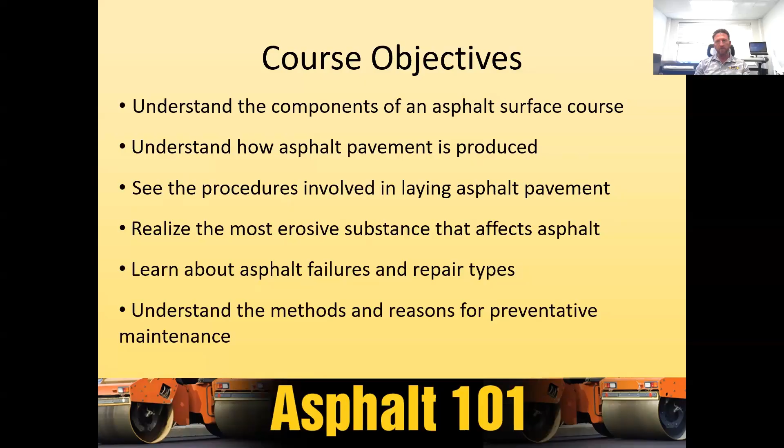And then we'll talk about what repair types correspond with each type of failure. We'll spend a brief moment on the methods and reasons for proactive or preventative maintenance, so we're not constantly going in and patching potholes and doing reactive work. We're planning for the future so we can budget better and so we don't have liabilities or libelous conditions on our property.

This is a typical asphalt pavement cross-section. A cross-section is basically if I ran a saw blade down the center of an asphalt pavement, or down the center of a wood table, this is what you would see if you looked directly at that saw cut.

Asphalt is a conglomerate material, but asphalt isn't something that you can just go get from the plant, dig out 2 or 3 inches of native soil, compact it, and then put the asphalt down. If you did that, your asphalt would fail immediately on putting a load on it.

Part of the structural number, about 25% of the strength and 100% of the foundation of an asphalt pavement, is called the base course. What that's made of, particularly here in South Florida, is a lime rock base. This is our foundation, and it's going to act as a bridge between the native soil material and the traffic loading portion, which is going to be our surface course.

It's typically between 6 to 8 inches thick, and it is constructed so that we have a solid neutral force, or a neutral foundation, below that asphalt, so that when a load is applied to it, it's distributed down through the surface of the asphalt, through the base, and then it acts as the neutral force back up to counterbalance that load that we put on asphalt.

On top of that base, we've got our asphalt surface course. In other parts of the world, or other parts of America that aren't South Florida, this surface course can be anywhere from 3 to 4 inches thick, and sometimes they'll even have 2 layers of asphalt. They'll have a base or binder course, which is a little bit larger rock for loading, and then a second course that's your surface course or wearing course. That's what you actually drive on, and it's the smoothest, smallest rock course.

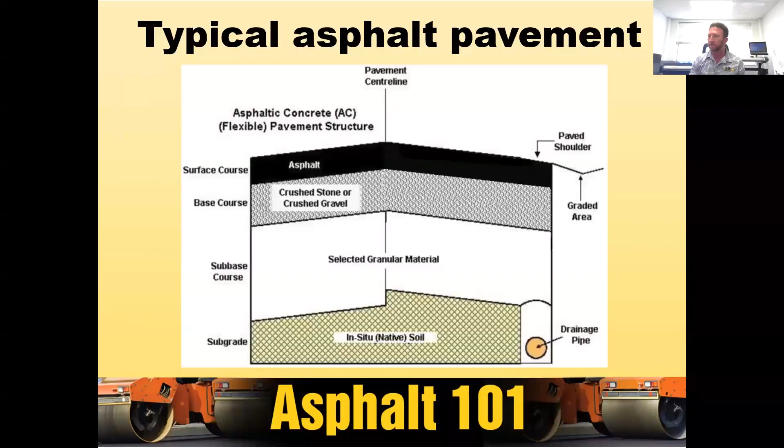What are the components of an asphalt surface course? 95% of asphalt concrete is just aggregate rock, but it's not gravel. Don't get the idea that this aggregate rock is just gravel or 57 stone that's all the same size. It is about anywhere from 8 to 12 different sizes and types of rock.

We need it to have large rock, which is going to be our load bearing rock and stone, and then we need it to have small aggregates, sand, fines, even down to dust that are void filling. We also need these to be angular. We don't want rounded edges or smooth stone in our asphalt, because it's impossible to get that tight compactness and not create voids. When you have voids present in the asphalt rock mixture, the rocks don't bind together when they're compacted, and you have open space.

When you have open space and you put a load on it, what happens? You get deflection of the pavement. So we want all this large rock, small rock, fines, and dust to all come together to create pretty much a solid matrix with very, very minute voids in between them.

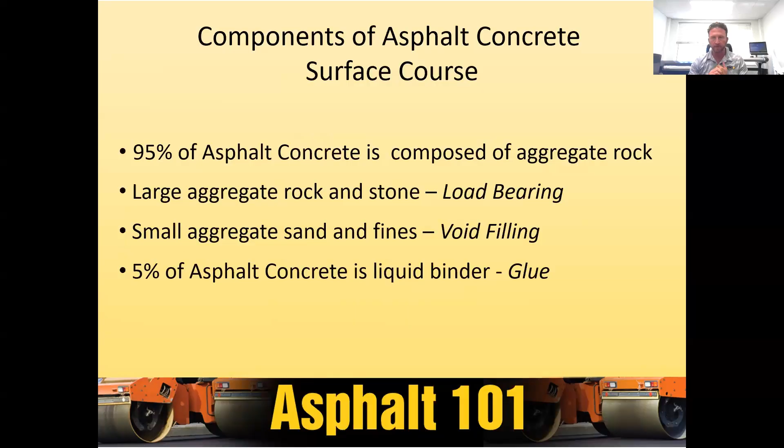The next 5% is simply our asphalt cement or liquid binder. That's what's going to hold everything together. This is also what drives the cost of asphalt and the price. This is asphalt binder. It's the resultant of the refining process of petroleum, and we're going to put anywhere from 4% to 7% of the total volume of this material as hot liquid binder.

That's what makes the pavement black, and that's what holds all the rock together. Without the rock, binder is useless.

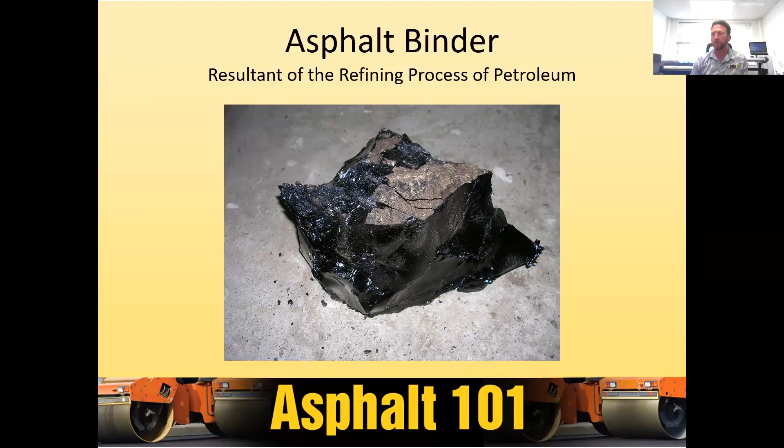Without the binder, the rock is just a gravel road. This is where we mix it in the plant together. You mix it all at a very high temperature and you get bituminous asphaltic concrete, which we just refer to as asphalt. You can see how people would start confusing asphaltic concrete with regular Portland cement concrete very quickly.

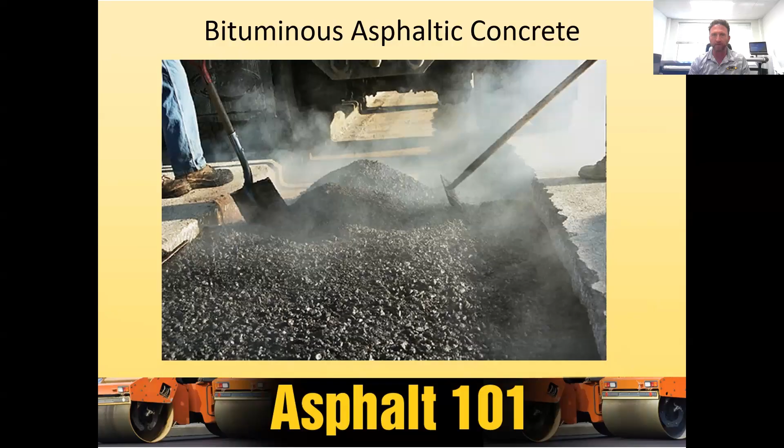They allowed us engineers to go back and say, okay, how can we confuse the public less when we're talking about our pavement materials? In this case, we're just going to call it asphalt. How do we produce this stuff?

We determine our design based on the intended use. I'm not going to use the same asphalt pavement on an HOA community street as I would in a Publix loading dock area or on an interstate. We're really determining how much load is going to be on it when we design an asphalt pavement, especially the thickness, but also the type. We're looking at how many trucks are going to be driven on that pavement in any given time frame.

We don't design asphalt thickness or mixes based on how many cars are going to be on it. They're inconsequential to the strength and longevity of asphalt pavement. We design it based on truckloads and drainage characteristics predominantly. What are we putting on it? What's the intended use of that pavement? Is it a neighborhood street? Is it an interstate? Is it a distribution center? Is it a shopping center? All of those may have a different specified material.

The amount of each component is based on the design. So how much of each size of rock, fines, and asphalt binder? There's about 25 plus or minus FDOT approved asphalt mixes that run the gamut of different consistencies, different rock sizes, different binder contents, different percentages of recycled pavement, etc. About 9 of those are surface mixes, what you would put on top for us to drive and walk on. All these components are mixed at the plant and heated at temps between 275 and 325.

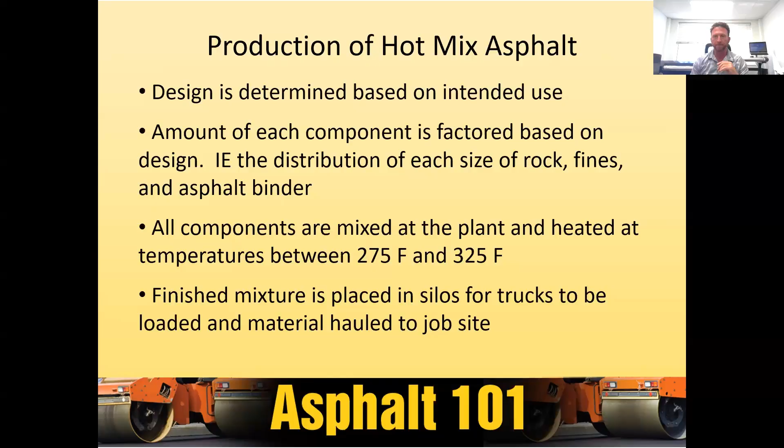That's called recycled asphalt pavement, and it's used to kind of perpetuate asphalt. Asphalt's the number one recycled material on planet Earth. So when we build or maintain existing roadways, we'll mill off a certain thickness of the existing asphalt pavement surface. Those millings are then hauled back to the plant, cleaned up, run through a screen, crushed, and then added in as part of the mix design of an asphalt pavement.

FDOT allows up to 40% of any given mix to be included as recycled asphalt pavement. In a real world scenario, we typically don't pull anything less than or more than 30% RAP. So you've got 70% virgin rock and binder, and then 30% recycled asphalt pavement.

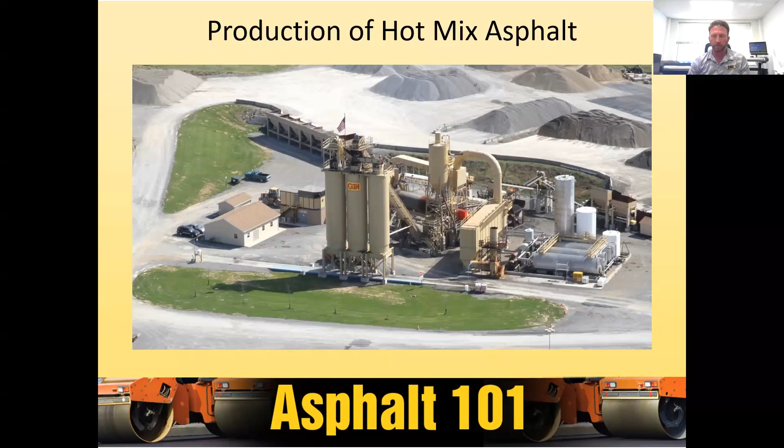So what am I going to do when I start laying this stuff? I've got my plant, the plant's waiting for me. I've got an order in for, say, 400 tons we're doing today. So the first thing I'm going to do is prep the surface, and this is very important.

The cool thing about a milling machine is if I've got 4 inches of asphalt on a roadway, I don't have to take out 4 inches to repave it. I can specify a depth of, say, 1.5 inches, and mill out that 1.5 inches and put back 1.5 inches. So I don't have to take out everything that was constructed first.

Now, as we talked about earlier, if I've only got 1 or 1.5 inches of asphalt, I'm probably milling down to the base rock anyway. But in areas where I have thicker asphalt, or areas that have been overlaid 3 times—a parking lot or roadway—I can take off a specified depth, so I don't have to go full depth.

This machine's got a 4 to 6 foot wide steel drum that spins at a very high rate of RPMs, with carbide bit teeth on it. As it moves along, it chews up that surface at the specified depth, then it comes through that long conveyor neck and spits the millings out into the back of a tandem dump truck.

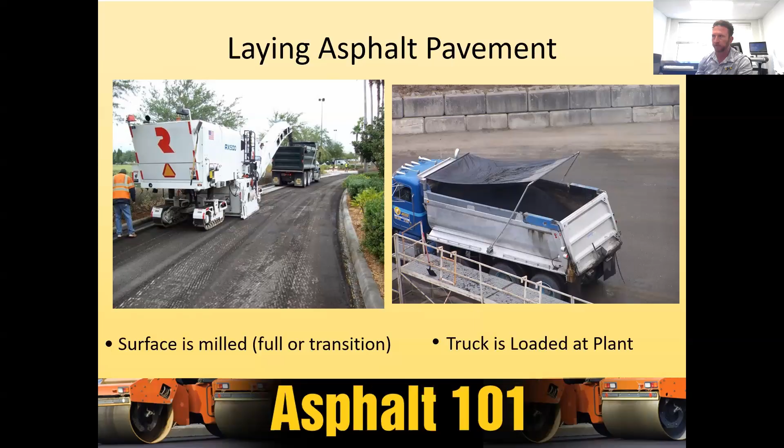While I'm doing my milling and removal process, I've got a truck being loaded at the plant, or multiple trucks being loaded to stage at the plant. I'm going to put a liquid tack coat over the surface. This is a grandiose example, but usually a good rule of thumb for my liquid tack coat is you shouldn't be able to take a step on the tack surface without getting tack on your shoes or boots.

This tack coat is my bonding agent between either the milled surface, the base rock, or just a regular non-milled asphalt surface if I'm doing an overlay. This is basically creating a very sticky, very adhesive surface that my new asphalt is going to go down on. If I don't put down tack, I risk delamination, where parts of the asphalt shove up and slip off the surface because there's nothing holding it to the previous surface being overlaid. Think of it like your driver's license: you've taken it in and out of your wallet 150,000 times over the years, and the edges start to peel back, and that laminate starts to come off. Same exact principle. I don't want that new asphalt to slip free from the surface, so that's why I'm going to use a tack coat.

After my tack is applied, I've got my truck that was sent to the plant, and it's going to load into my paver to overlay the surface with new pavement. Again, I'm using a wearing course mix, a surface mix. An example of that is Superpave 9.5, or S3. That basically means 9.5 millimeters is the largest rock in that mix, so I've got 9.5 millimeters and under within that rock matrix.

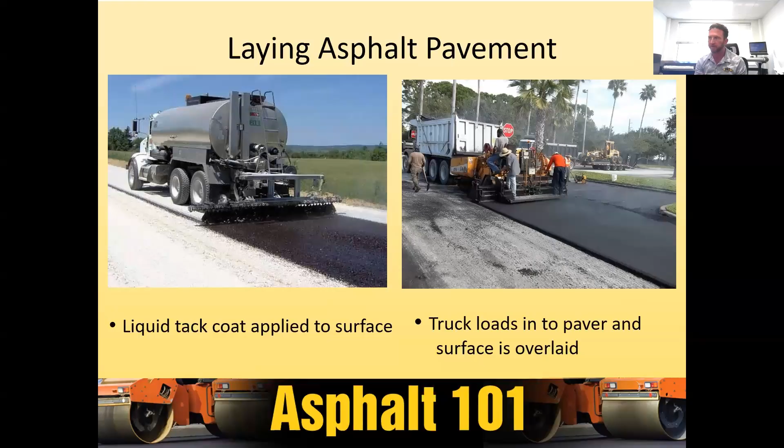After it's out of the paver, I'm going to roll and compact it with a vibratory traffic roller. What this guy's going to do is get me my finished elevation and fully compacted surface for the asphalt, so cars and trucks can drive on it. Out of the paver, I've only got about 82 to 85 percent relative compaction, which means if I put a truck on that without compacting it further, it's going to create ruts, shove the asphalt, and create tire tracks. It's not ready - you're not finished once it comes out of the paver. Even though it may look nice and smooth, you don't want to drive on it yet. You've got to put this traffic roller on it.

This roller weighs between 4 to 6 tons, very heavy. We're going to do an industry standard of 2 passes in both directions - 2 with the vibrator on, 2 with the vibrator static. My first 2 passes are vibrator on, which gives me my most compaction - it consolidates the material and presses it down. My last 2 passes are static, without the vibrator on. That should get me down to about 92% plus relative compaction, and I'm ready to drive on it.

This all has to happen within about an hour to 2 hours to ensure I'm compacting that material at a temperature of about 225 F or above. If I don't compact it at that heat, if I let it get a little colder, I risk loose aggregate at the top called raveling. I risk segregation, where you can see some voids in the aggregate when you look closely at the pavement surface. The ideal pavement surface should look very, very flat, like glass.

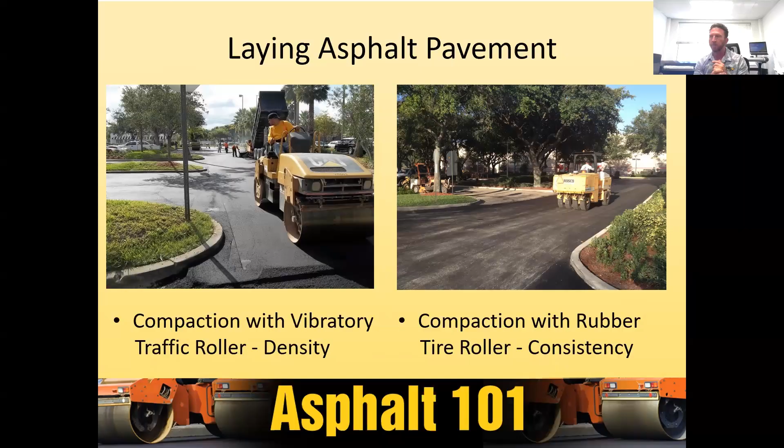My next step is I'm going to compact it with a rubber tire roller. That's going to give me the surface consistency I'm looking for. It fills any voids, like if some rock popped off the surface during the other rolling procedure, and it gives that material its first introduction to what a rubber tire feels like. So we're basically getting it prepared for tire traffic from cars and trucks. After that point, I'm done and this is ready to drive on.

My last step is I'm going to apply the pavement markings per the design professional or local code. Pavement markings are a traffic control measure - these are safety measures. They're telling people when to stop, where to turn, and where to park. So we can't take these for granted, and you certainly want to get them right the first time, especially on a brand new pavement.

So a stop bar, that's what that thing is. It should be accompanied with a stop sign nearby - that's where you're supposed to stop. Everybody in the audience, you're supposed to stop behind this guy, like you remember from driving school. Then you can slowly move out to the intersection and make your turns or make your through movement. That's why we have the stop bar there. Directional arrows will tell you which way you need to go as far as traffic flow.

A little tidbit here - something not necessarily asphalt related, but I think everyone should know. When I've got a double yellow line, that means I've got traffic moving in two different directions, and it's splitting that. If I've got a single white line, that means I've got a lane division, but traffic moving in the same direction. So when you see yellow, it's splitting a traffic lane for cars moving in opposite directions. When you see white, it means you're separating traffic lanes that move in the same direction. A lot of people may not know why we do it that way, but that's why it's done that way.

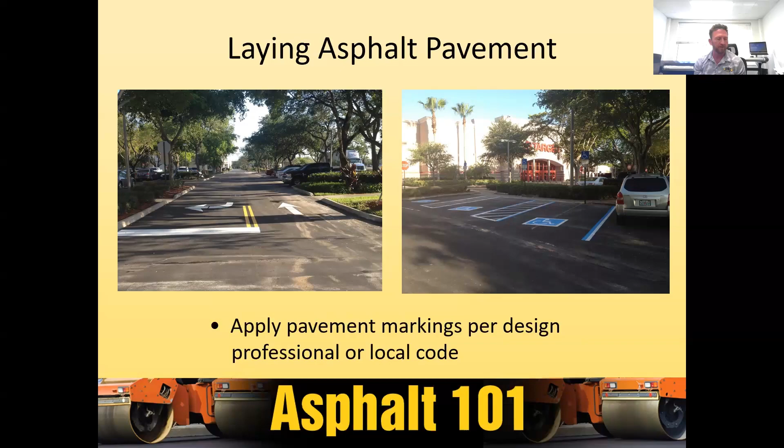I don't have to tell you guys, but especially with regard to ADA, it is a code enforcement thing, and you need to have the right spacing, the right angle, and the right size for both the parking space and the access aisle to ensure that you're compliant with ADA code. So let's get it right the first time.

So I've got my brand new pavement. I've made this investment. Everyone in the community is super happy. The project gets done. And now, just like everything else in life, it starts to decay and die on us the second we walk away from it. Whether you put a new roof on, do an HVAC improvement, or do a parking lot, Earth starts to take over, the elements start to win, and we've got to know how we're going to maintain this investment.

First, we're going to talk about corrosive substances. These are the things that are bad for asphalt surfaces. Gasoline and oil spills, I don't have to tell you that - go to any AutoZone, Advance Auto, or O'Reilly Auto Parts and look at the front parking spots and see what oil stains do to asphalt pavement. Battery acid and chlorine, typically not something that we've run into, but certainly you don't want chlorine or petrochemicals on the asphalt surface. It will eat it away and decay it. Sun and ultraviolet rays, especially down here in South Florida, it's something we have to keep an eye on, and that's one of the reasons why South Florida does so much seal coating. And oxygen, certainly just the wind and everything.

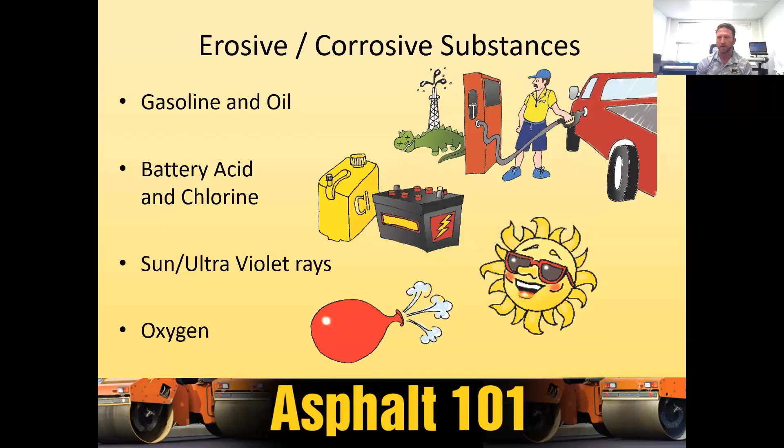But the most erosive substance on planet Earth is water. That applies across the board, not just asphalt pavements. But if it can create a canyon, which is this grand, it can certainly create erosion and premature wear on the asphalt surface. So I'll say it again: water is the root of all evil in asphalt pavement construction and maintenance. We want to keep water off the pavement surface as much as we can, and we want to keep water out of the base, especially in northern climates, but even down here. You don't want water to get into the base because base rock is much more erodible than an asphalt surface that's been compacted. It's just kind of common sense - if something is easier to drain through, then it's more erodible. That's just the way water works.

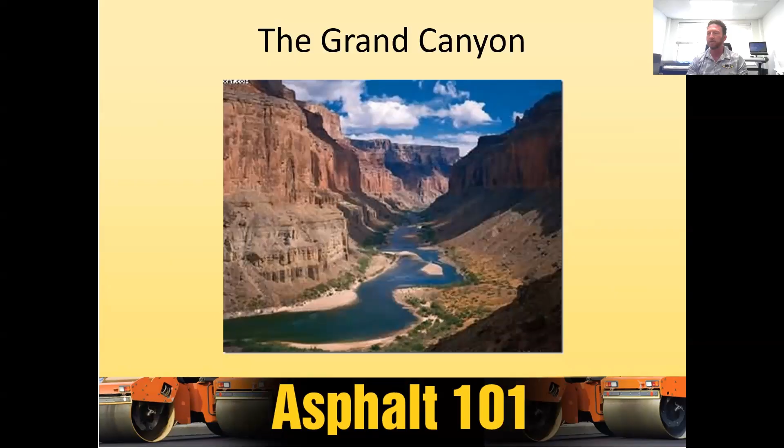So what are some typical asphalt surface failures that we deal with after we construct and while we're maintaining our asphalt pavements? Certainly damage due to poor surface or subsurface drainage. If I've got area drains or inlets within my parking lot or roadway, I want to make sure water's getting to those. In this case, you've got a curb that's damming some water, and you can see all the damage around that grate inlet because the water's not getting into the grate. So you've got a combination of restricted flow, or the drain is sitting higher than the asphalt around it.

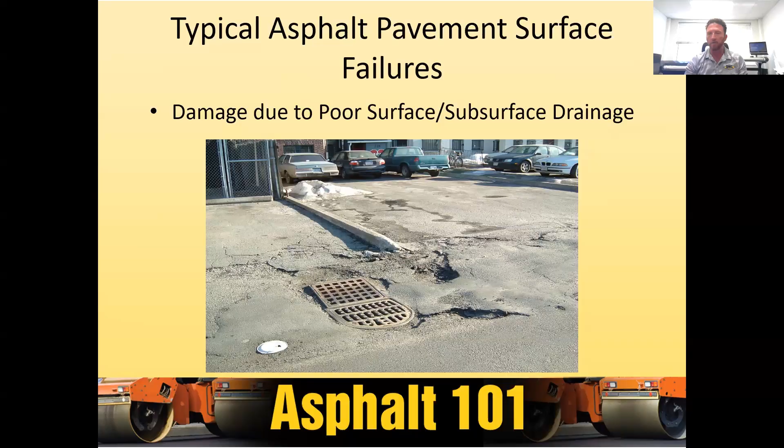So as water ponds around there and it gets driven on, the asphalt starts to fail. If you've got an area in your community or parking lot that holds standing water a lot, go look at it when it's dry and you'll see fatigue cracks starting to form. You'll see asphalt failures, depressions, and rutting in those areas simply because you're weakening the surface by leaving that water on the surface.

Fatigue cracking due to repeated heavy traffic loads - typically that's what it's caused by. This is also called alligator cracking because of the shape it makes; it looks like the back of a gator. This is a structural failure, and this isn't a surface that can just be milled partial depth and overlaid. Again, asphalt's only as strong as the material you're putting it on top of. So if you've got a nice sturdy foundation, a solid base, or a structurally performing asphalt, you can cap that with more asphalt and you'll be just fine.

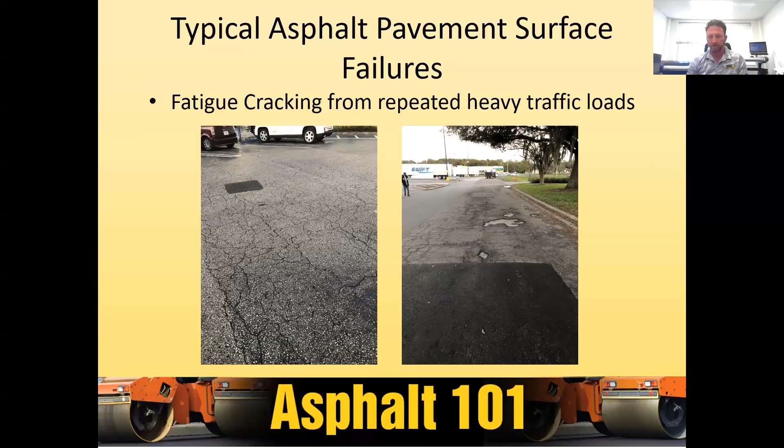If you've got a structurally failed base, such as a fatigue crack or high severity failures like this, and you just put asphalt over the top of it or even mill portions of it, you're going to see those failures reflected through. It's very important that we address this from a full depth or structural perspective before we go in and make any new overlays or improvements. Oxidation from the sun and ultraviolet rays - this is a big one.

And it really certainly applies down here. But when you have a surface asphalt pavement, it starts to oxidize day one from the sun. So you have a bituminous material, remember that binder. It's an oil-based material, and it will start to oxidize.

Just like the 2002 candy red Honda Civic that you bought brand new and drove off the lot. If you didn't wax it, if you didn't maintain that paint, which is a bituminous paint, it's an oil-based paint, if you don't maintain it, it starts to turn pink. That's not just the Lord's work, well it is, but it's because the sun is shining on it. That sun creates oxidation of that paint material, and that oxidation causes that bitumen to evaporate or oxidize.

And you're left with what the base layer is. The base of the car is going to be the metal that the car is made out of. So it's going to be tempered, it's not going to be as red anymore. What was the color of those stockpiles in one of our first slides at the asphalt plant, right? It was gray. So when asphalt oxidizes, you're removing that black liquid binder, you're removing that oil, that bitumen. As it oxidizes, you're left with exposing that rock, which is gray, which is why all asphalt pavements over time, as they oxidize, turn different shades of gray.

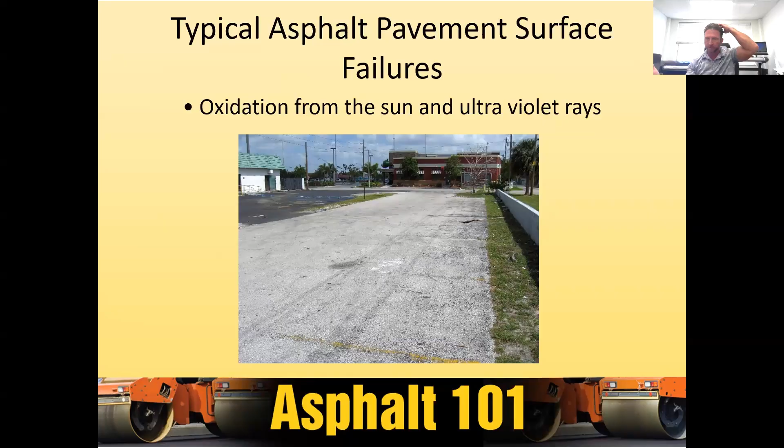That's really not a failure that we want to have happen to our pavement, because what happens again when I don't have a nice tight matrix at the top, when I have loose rock at the top, now I'm allowing water to infiltrate and penetrate through that surface, and then water gets into the base rock, and I start to have more structural type failures because I've weakened the entire structure of the pavement. So very important, it starts at the surface, but you let the sun oxidize it, you get loose rock, you get a more permeable or pervious asphalt surface that allows water to drain through it.

Then I've got problems upon problems from that. Oil, gasoline, petrochemical spills - this is an example of oil stains that have been left unaddressed. Those potholes there are not caused by standing water, or caused by repeated heavy traffic loads, or under design of the pavement. That's simply something that has eroded over time due to oil sitting on top of it and softening the asphalt. Asphalt hates motor oil. It is corrosive and it will absolutely fail the asphalt pavement.

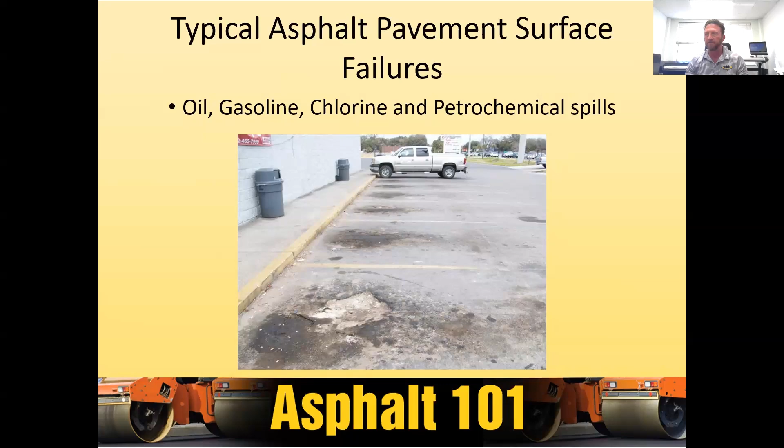That's an indication of something that's much more severe going on below the surface. Sinkholes in asphalt pavements are usually caused from a drain pipe that has a breach underneath the surface, 9 times out of 10 — I would say even 99 times out of 100.

Sometimes you can get a sinkhole from offsite runoff coming in and washing away the base, like on the edge of the pavement, and you kind of see it start to form. But usually a sinkhole is formed because you have water leaking out from under the pavement surface, as deep as the pipe is, and it's eroding the subgrade, eroding the base, and all of a sudden that erosion makes its way all the way to the top.

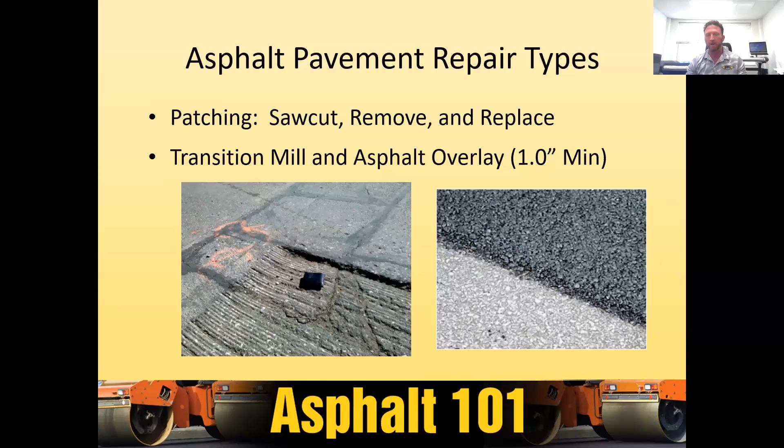We can only do this a couple times though, because then you start getting into drainage concerns, grading concerns. If I raise the elevation too much, and you'll see this, I guarantee it, now my drain inlets are sitting too low because now I put 3 inches on top of this thing. And yeah, even if I milled around and tied into it, now my drainage inlet is 3 inches lower than the surface around it. And you can have, you can have situations where you have a localized depression there. So you want to avoid that.

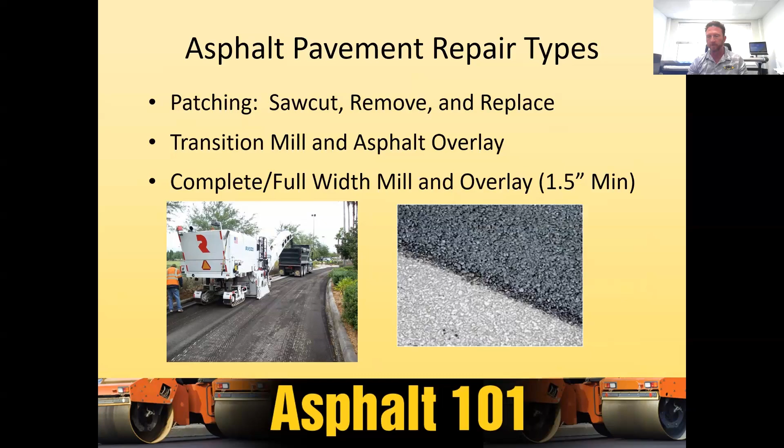And then complete full width mill and overlays. So this is again where I brought that milling machine out. I milled the entire surface, and then I overlaid that milled surface. And sinkhole repairs. All right.

So here's a sinkhole. This is a good example that I want you guys to kind of understand. When you've got a sinkhole, or you think you've got a sinkhole, it needs to be addressed properly. First of all, you need to get an asphalt paving contractor that knows what the heck they're looking at. They need to be able to ID the rudimentary difference between a pothole or something much worse like a sinkhole. Usually you can see there's a void underneath it.

So that's going to be my number one tip: is there no base rock, is there a void, something's wrong. In this case, it didn't take a scientific rocket to figure out that I've got a grade inlet, curb inlet combo that's a couple feet away. So I know that I've got something going on here, and it's either got to do with the pipe that's connecting that inlet to another inlet, or it's got to do with the box itself. Like water is getting out of the inlet box itself or the manhole itself and allowing it to seep into the base around it.

In this case, I don't know if you can see from the other side of the fence here, but you've got an inlet on the other side. So my pipe is just running in this way. It would be very rare for this sinkhole to form if I had a pipe breach connecting those two inlets. So what I figured is I had a shoddy installation of that grade inlet. I'm not going to be able to determine that until I dig the area out.

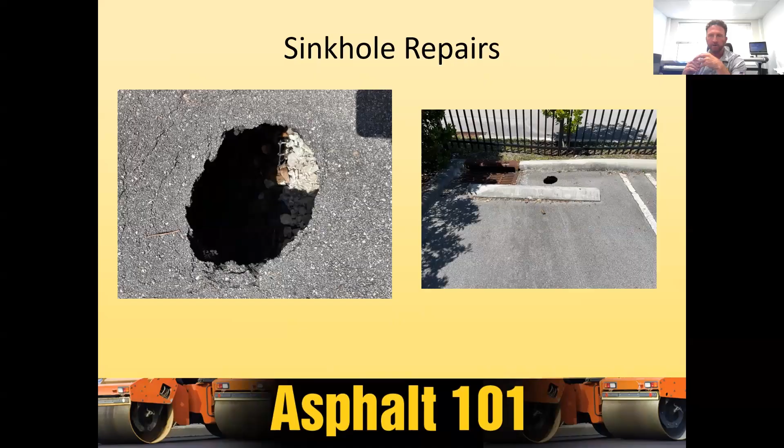Okay, so we call this excavate and investigate. We're going to find out where the heck that water is getting out of, and we're going to make sure that we do the proper repair. Well, in this case, I have this cap here. Here's your manhole, and here's your cap that had the inlet affixed to it. And you can see you have a void between the two.

This should have been filled with hydraulic cement or some sort of flexible connection material that didn't allow that. Instead, what they did was, no one's ever going to look at this, again, I don't have to worry about it, it's off in this corner of this parking lot, it's not such a big deal. It is a big deal. And in times of heavy rainfall, and I don't have to tell you, in South Florida we can get pretty intense rainstorms. This is actually over in Doral.

Water gets above that threshold, moves from the bottom of the drain all the way through the box, fills up there, and then seeps out of this portion. You can see how much void was created because of that. You've got the pavement surface here.

My guy's knee deep in this hole, and you've got a significant void here. So the first thing I'm going to do is fill that void between the concrete cap and the circular manhole box, then backfill this really well with lime rock base before I go back and patch it. A lot of times it's more than meets the eye, and you have to dig in and see what's going on.

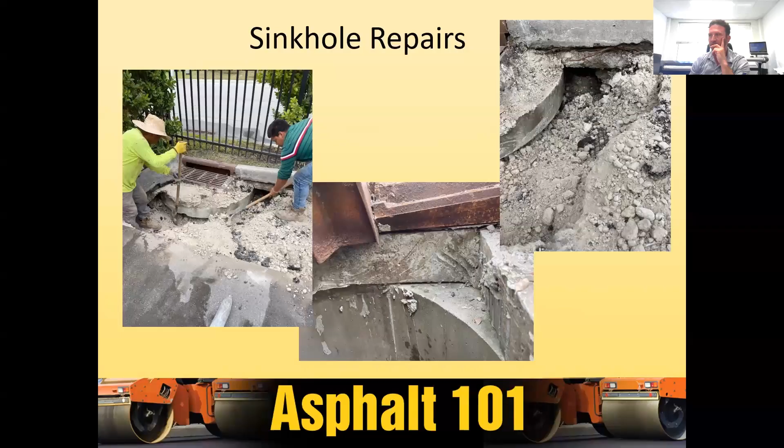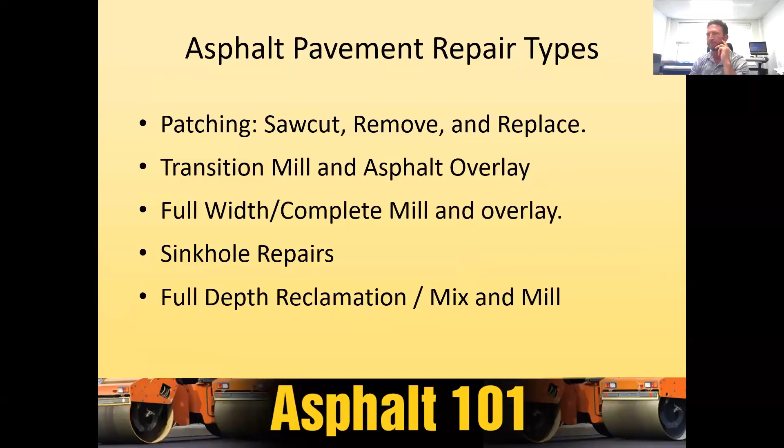Full depth reclamation and mix and mill. So if I've got this condition here, where I've got this high severity alligator cracking, and I can see the subgrade pumping through the surface, I don't get to just play nice and mill and overlay anymore. What I've got is failed asphalt and contaminated base. I'm really at dire straits here.

I can't do a mill and overlay, it's going to just fail immediately. In this particular example, you had about a quarter inch to a half inch of asphalt that was apparently laid on either native subgrade or a very small amount of base rock. This was certainly not a good installation job from jump street.

When you have poor new construction, you have poor maintenance. And if you don't do the things you need to do to get it back to what it should have been, you're going to perpetuate this problem years and years down the road. It's just kicking the can.

So a good engineer is a little bit lazy. That's Noel's rule, from one of my surveying professors back in the day, the beginning of the 2000s: a good engineer is a little bit lazy. They're going to find the easiest fix.

Usually the engineer's fix is, alright, I've got this type of failure, I'm going to go to the book. What's the book say to do? The book says I need to do full depth reconstruction. When I do a reconstruction, that means I'm taking all the asphalt out, any base out, especially if it's contaminated, and maybe into the subgrade too, and I'm going to stabilize that subgrade. I'm going to bring in 6 to 8 inches of new base rock, and put down 2 inches of asphalt. Because that's what the book says to do.

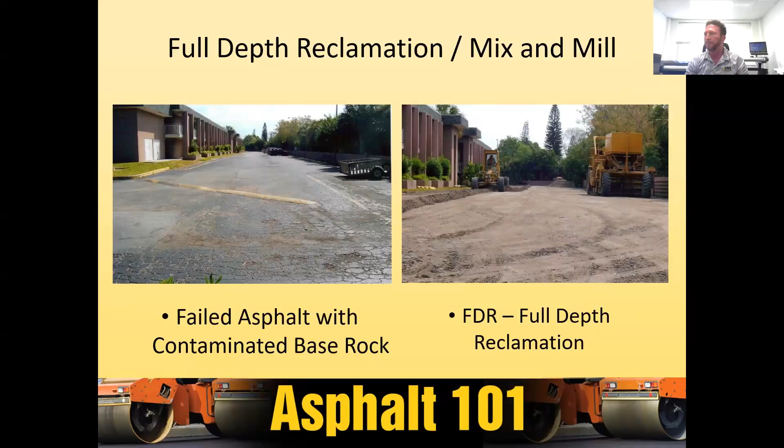So I'm tilling it with that machine, and then I'm going to roll it with one of those heavy rollers we saw earlier, and fine grade it like I would any roadway, reestablishing the grades and elevations that are there. Once I've created that new surface, fine graded it, and recompacted it again, I'm paving over the top. When I pave over that, I've got a brand new pavement surface with 90% of the material reused in place, and only the asphalt brought in separately.

So I've got a little bit of spoil. Obviously when I do some regrading or fluff it up, I've got a little bit of spoil that I'm taking off. But I've really got a lot of solid foundation, a solid base to use there without taxing the environment or bringing in a ton of extra material.

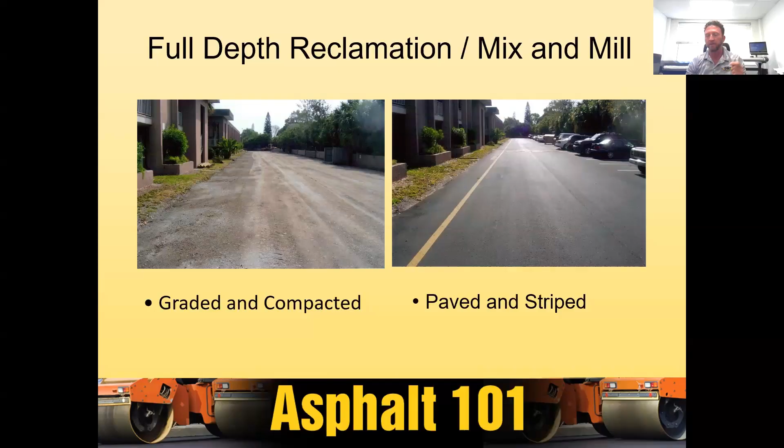Just kind of ballpark figures: full depth reclamation is going to run about $8 to $10 a square foot, whereas a full depth reconstruction can run $30 plus. Completely different ballgame.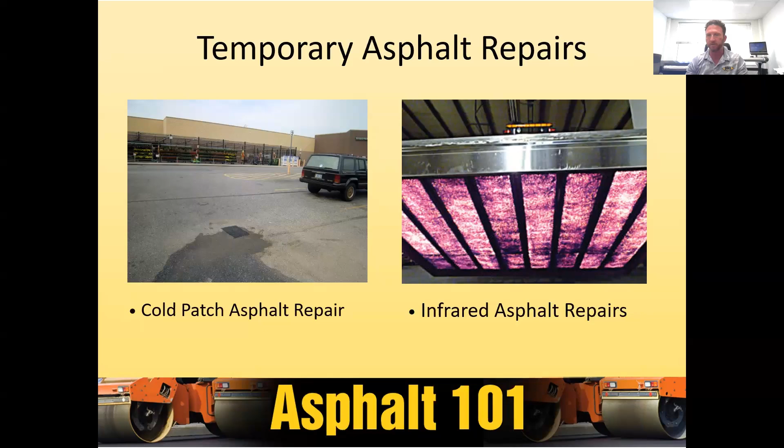Infrared repairs we typically don't use down here in South Florida because we have a whole lot of asphalt plants to borrow from. But what this involves is heating the material that's in place, making it malleable again, and then raking it into a void or pothole and recompacting it. They use these a lot up north when the plants are closed for extended periods of time, so they can fill holes that way.

All right, preventative maintenance seal coating, the moment we've all been waiting for, right? I've got my brand new pavement, I spent, say, hundreds of thousands of dollars on it, I budgeted for it. Now I need to protect it and maintain this stuff, guys. We don't want to get into the habit of constantly going out and patching potholes, patching areas, patching root damage, things like that. I can protect this in other ways.

So the main thing that seal coat's going to do is protect from oxidation and reduce the erosive effects of water. Remember that gray, nasty parking lot we saw that's never been seal coated? If I went and seal coated that thing, I'm doing it purely for beautification purposes, since there's no binder left on the surface. But with my brand new overlaid parking lot or overlaid roadways in my HOA, that's different.

I want that asphalt to be protected. Most importantly, I want that layer of binder at the very surface to be protected so that it doesn't start to lose rock, so that it doesn't start to lose that tightened surface compaction. So I'm going to seal coat. That's how I'm going to protect it.

Seal coat does not add strength. It does not add longevity or wearability. What it does add is the ability to keep that top layer of binder in place without oxidizing over time. That leads to longer structural performance, less rock on top, and less potential for water to infiltrate through the pavement surface and into the base.

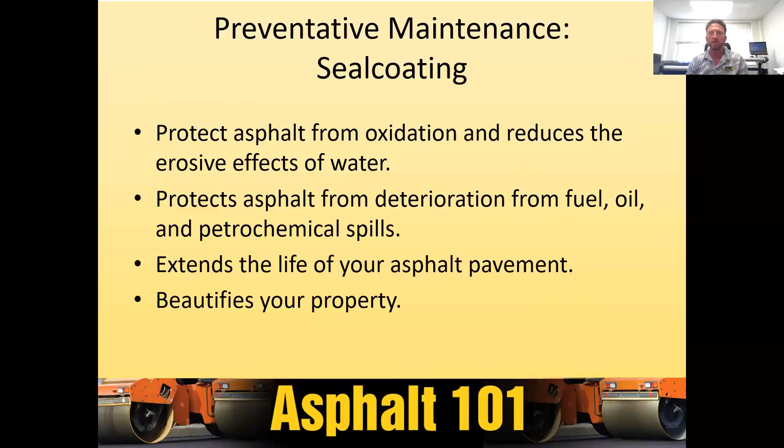Absolutely. When you put down a brand new seal coat, it not only makes it black again, but guess what happens when you restripe? All the lines are easily visible. If I go out and restripe an oxidized parking lot, that paint's going to last half as long, and I'm not going to be able to see it. It's not going to be as vibrant because it's going to soak into the asphalt. It's going to wear faster, and it's not going to be as vibrant.

This is a degradation curve. That's basically a nerdy way to say the way things die over time. Your blue line is the condition of asphalt left unprotected - okay, it's my do-nothing scenario. So I've got a 15-year design life of this asphalt. You can see that over the first couple of years, I'm going to be okay, then I've got a much more drastic slope on that curve as it gets to a poor performance quality.

My green line is a typical 3-year seal coating application where I'm going through, and I'm not totally bringing it back to 100% quality, but I'm extending the life of that asphalt pavement because I'm keeping that binder nice and tight at the top of the pavement. I'm keeping that rock nice and tight and not allowing it to ravel. So you can see when I get to my 15-year period, now I'm at a level of service of, say, a high C or even a B, and I've extended the life of that pavement for 10 more years, maybe until I've got to overlay.

I've also spent less in maintenance costs doing pothole repairs. I'm striping every time I'm seal coating - so you're striping regardless, whether you seal coat or don't seal coat. So I'm saving money, and I'm doing the right thing by my customers, by the people utilizing this, whether it's a shopping center or an HOA. I'm really delaying the cost of a capital project while spending less on a yearly basis in just general maintenance.

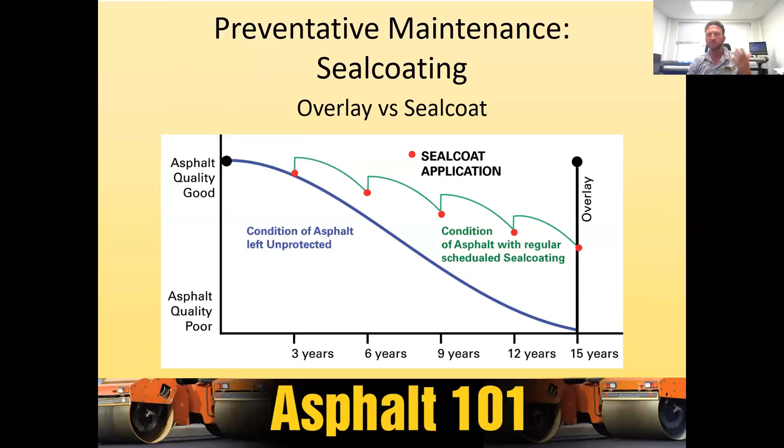These are our examples of coal tar emulsions: PolyPro and Staycoat JC-7. Polypro is a highly formulated product. It's got a lot of polymers in it. It's very durable, goes down very, very black, and lasts for a long time. Staycoat is kind of the standard federal spec sealer that we use.

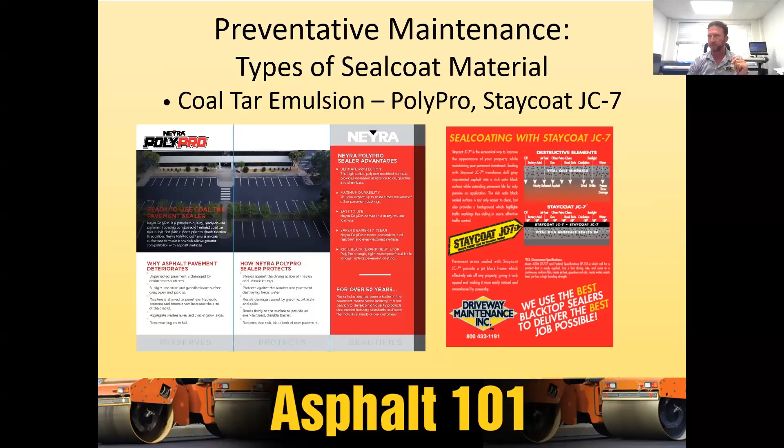There are also asphalt emulsions. Some states and municipalities require you to use an asphalt emulsion instead of a coal tar emulsion. Real quick, does everybody know what an emulsion is? Didn't think so. So you know the old saying, oil and water don't blend - well, they do, and it's an emulsion. We mix our sealer either here in the yard or pre-mixed at the plant with cutbacks of water. That's what the emulsion is.

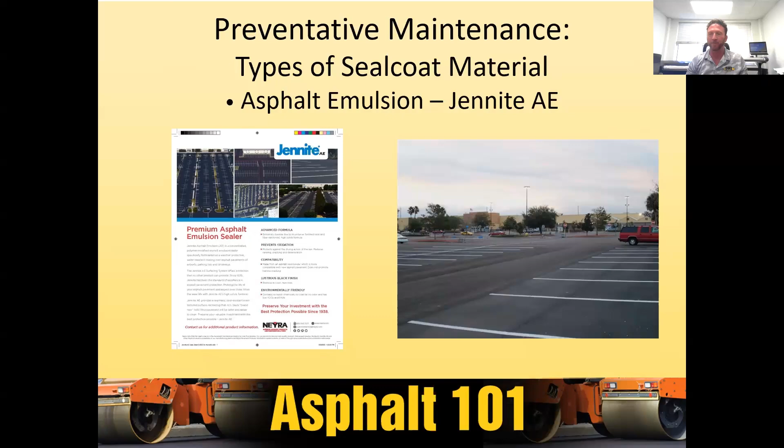If you used shampoo in your hair this morning, that was an emulsion. If you're going to eat a vinaigrette on your salad later today, I hope you're at least eating a couple salads a week - that's an emulsion. I wouldn't encourage you to put a coal tar emulsion down on a salad, but these are the same from a chemical reaction perspective. This is the same type of stuff. So in summary, asphalt pavements are built over crushed aggregate base materials and consist of rock and asphalt binder.

Asphalt's only as good as the material that you're putting it on top of. If I've got a nice structurally sound foundation, whether it's a base rock or a nice built, maintained asphalt surface, I can put new layers of asphalt over the top of it and expect it to perform accordingly. If I have structural failures, or a contaminated base, or not enough base, or no base at all, expect immediate failure.

They're damaged by petroleum distillates, petrochemicals, oxidation, and water, primarily. They can be easily repaired by removing and replacing damaged sections, or by overlaying, depending on what our existing conditions are. And asphalt can and should be seal coated as a preventative maintenance measure to protect, beautify, and extend the life of the pavement surfaces.

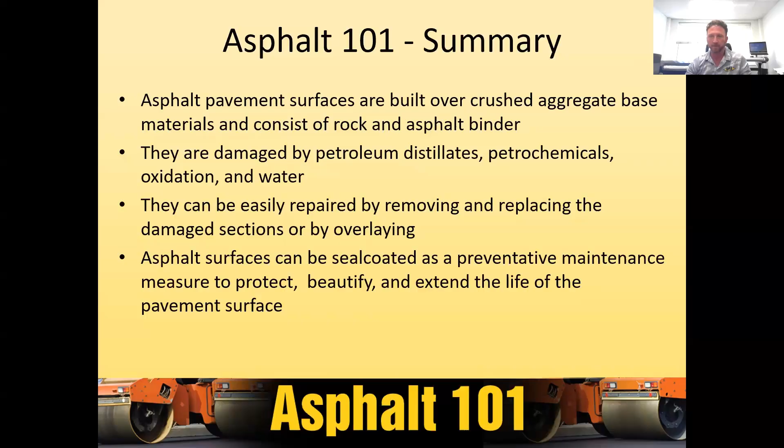Spend your money the right way and plan ahead, and then you can make everyone in your world happy. We don't want upset board members, and we don't want upset customers when we're constantly playing the reactive game. That's what I've got, and I will stop sharing here.